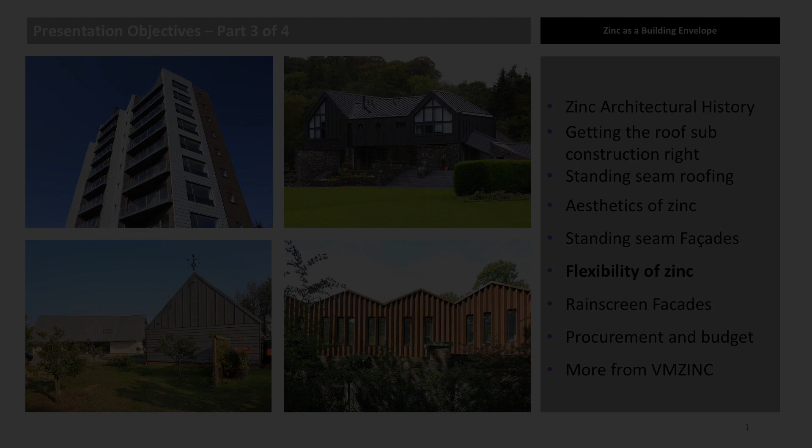Next, the flexibility of zinc. Almost immediately after zinc was first chosen as a roofing material at the beginning of the 19th century, it started to be used as a metal to create roof ornaments. And it still is. On the right, zinc ornaments combining with slate on a bank in Toulouse, France, and on Clapham Bandstand. Ornamental techniques are also used to create complex facades and roofs.

On the left, a project on the Isle of Skye, which uses stamped standing seam panels. On the project bottom middle, in New Jersey, where quartz zinc has created a facade with depth which includes all of the contemporary mouldings and cornices.

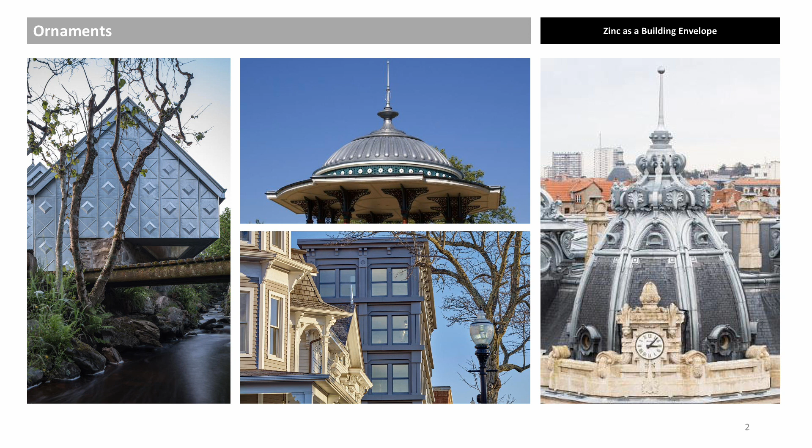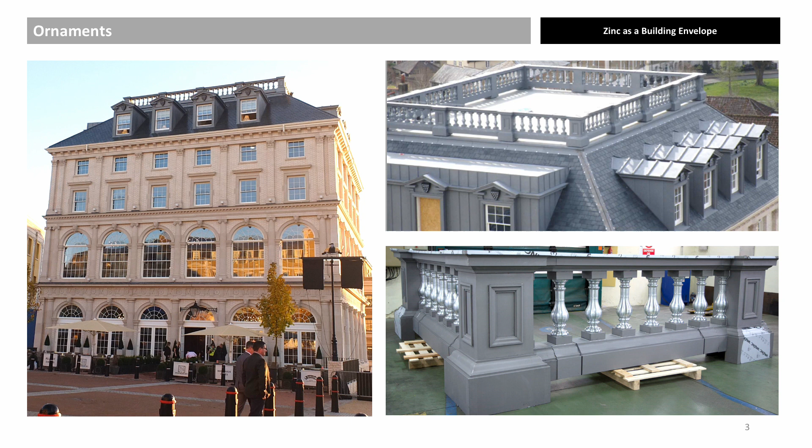At Poundbury, zinc was used in a number of ways, including dormer windows and balustrades. Again, the malleability of zinc allows almost endless numbers of shapes to be formed, whilst greatly reducing the weight of the products when compared to stone or even lead.

On the Parsons Tower project at Newcastle College, anthrazinc and quartz zinc standing seam panels were used to renovate an old 1960s educational block. Zinc lends itself well to this use as it is lightweight, flexible, and a dry trade. The two photos on the left show an example of an extensive retrofit project in France.

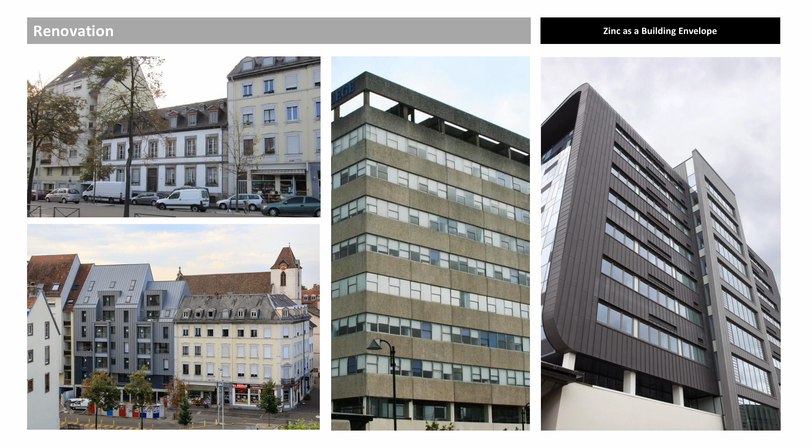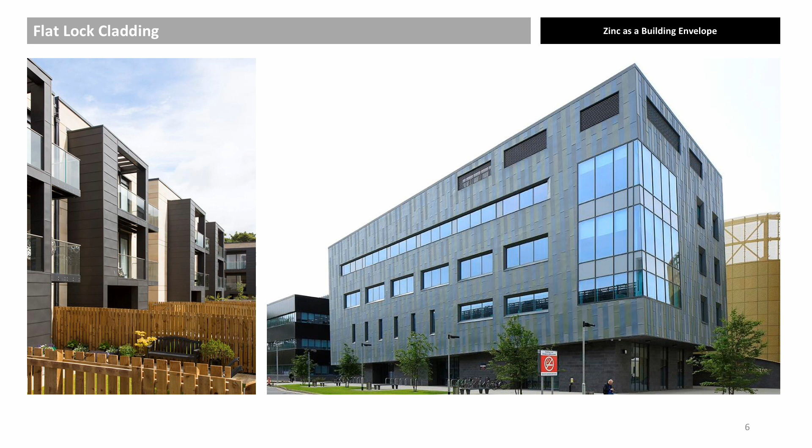The choice of systems for zinc roofs is fairly straightforward, but for facades the options are far greater. Standing seam panels, rain screen cassettes or flat lock panels, which we are now going to look at a little more closely. Flat lock panels come in many shapes and sizes, but 3 meters by 600 millimeters is just about the maximum size recommended. Bespoke shingles are also possible, as seen on this project in Canada.

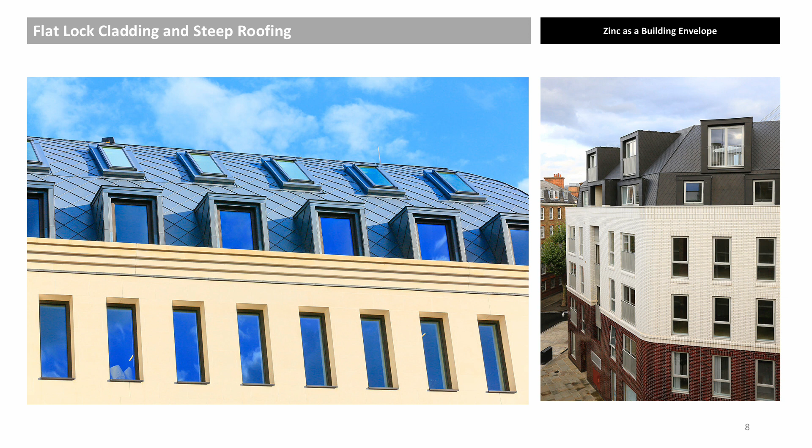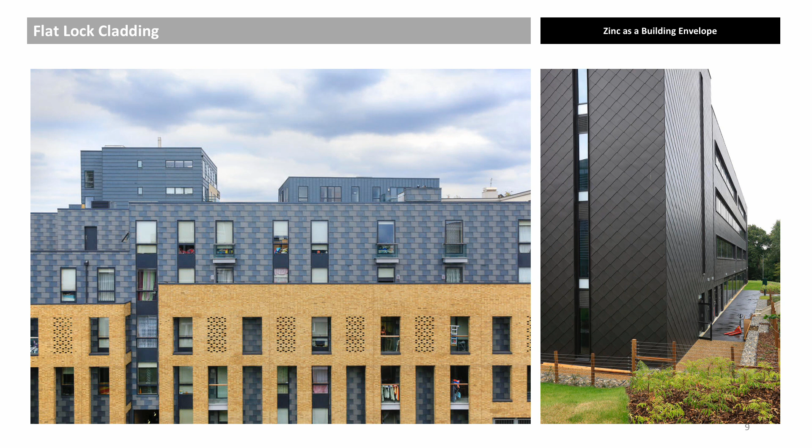Diamond shingles can be used for roofing on slopes above 30 degrees, seen here at Brook Street and Bourne Estate. Kingsland Wharves, Islington by JCMT Architects, and New Science Building at University of East Anglia by Fraser Brown McKenna Architects.

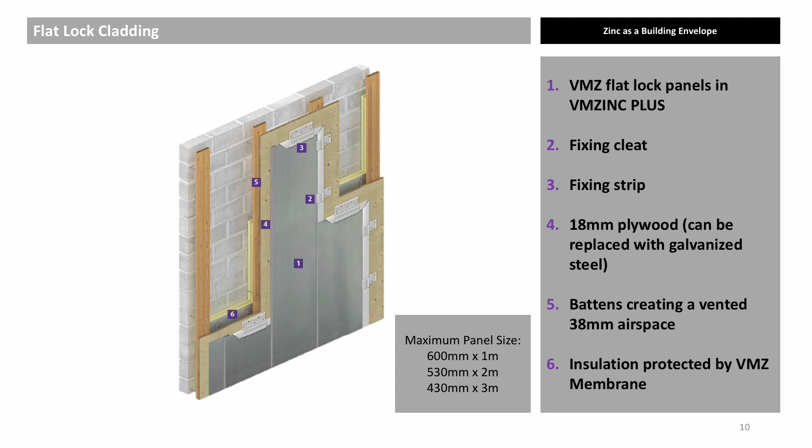Traditionally, zinc flat-lock wall panels of all shapes and sizes have been installed over a vented timber support, and this is still the case for many projects. For projects where EN 13501 A1, A2 materials are required, the timber can be replaced with a 0.7 mm thick galvanized steel deck. As with all cavities, fire barriers must be used in accordance with B3 and B4 of the current Approved Document B. This system still follows the principles laid out in Code of Practice 143-5.

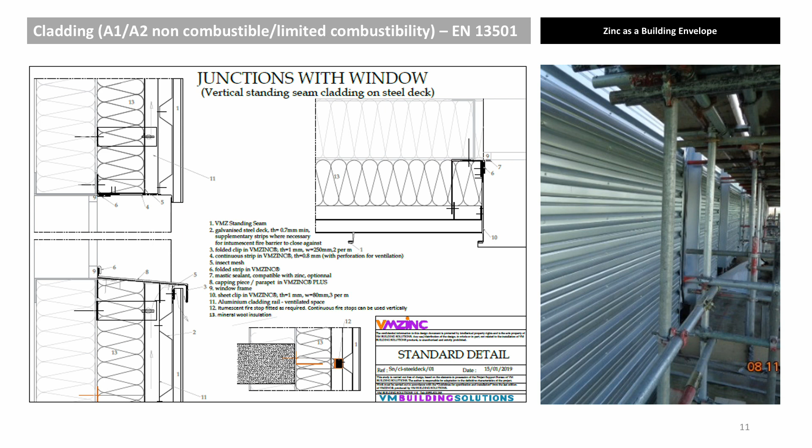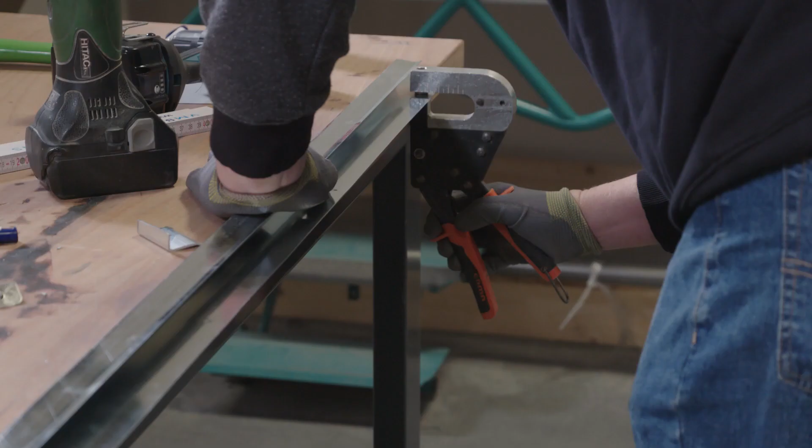Let's look in more detail at the installation of flat-lock panels. Flat-lock panels can be used for steep roofs, but are generally used for wall cladding with a continuous support. The panels are very flexible and can be diamond, rectangular or square in shape, and most commonly have offset joints. Receiver U-shaped flashing strips are cut to size and screwed into place at the windowsill, jambs and head, in this case in natural zinc.

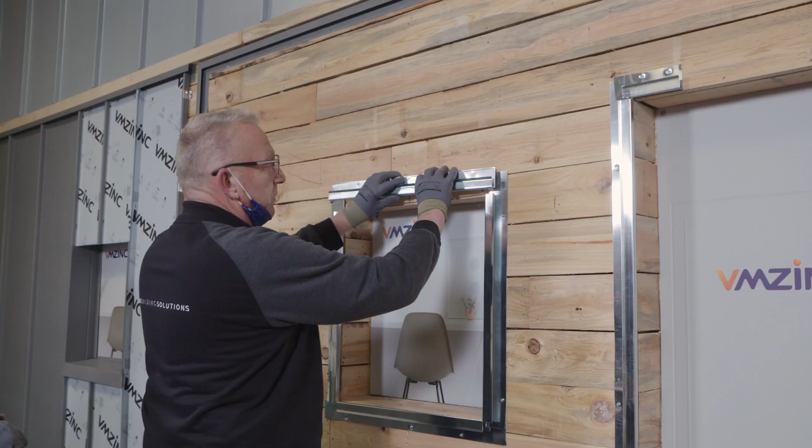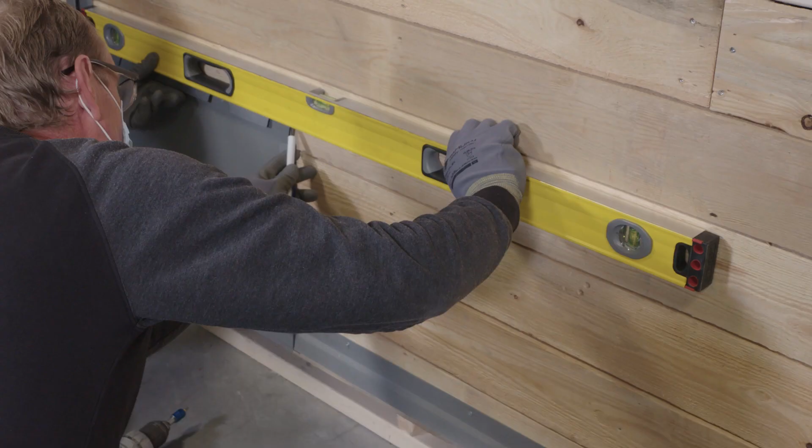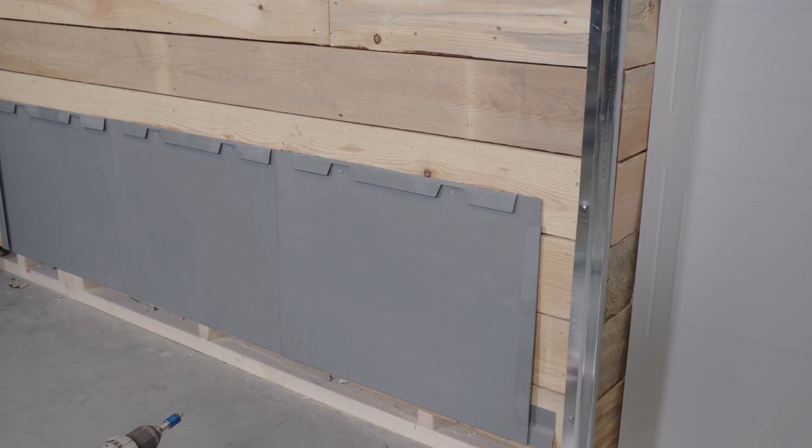At the base of the wall, a receiver flashing is installed, and the flat lock panels are fitted on a perfect horizontal line from bottom to top. Some flat lock panels are fitted with cleats, but here notches have been created, allowing the panels to be screwed directly into place. The panel next to the window jamb is cut to size and fitted.

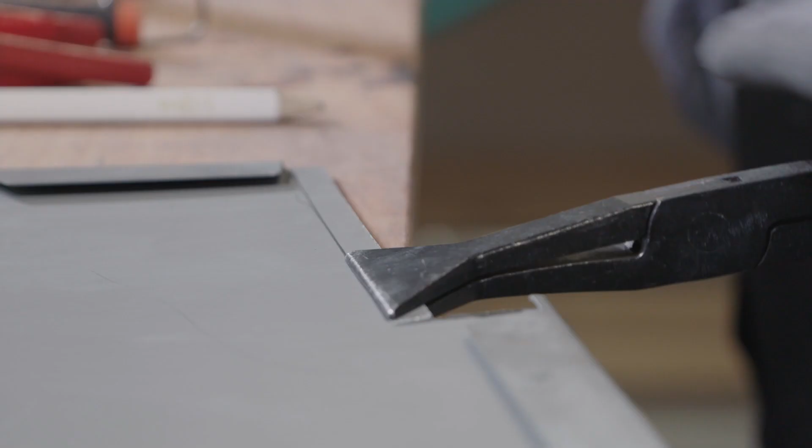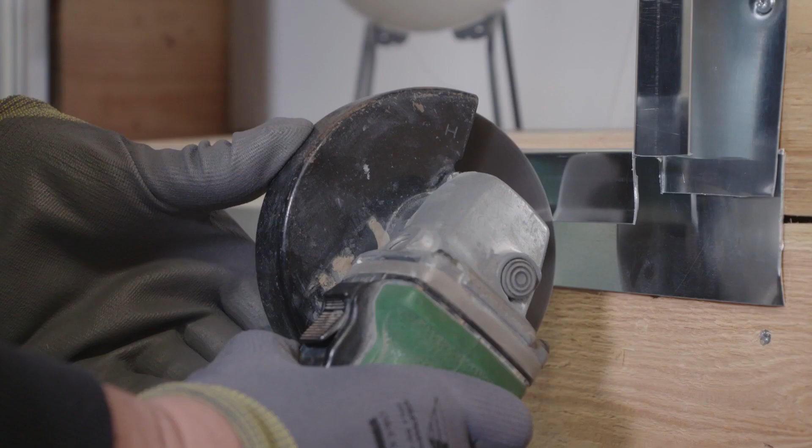The receiver strip at the sill is notched, allowing easy access for screwing in. The panel that wraps around the jamb and head is cut to size with a grinder, but shears can also be used. This panel has an additional 20mm upstand.

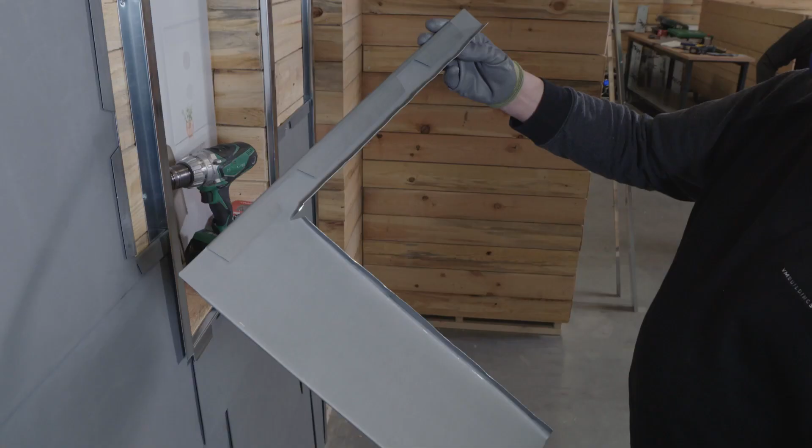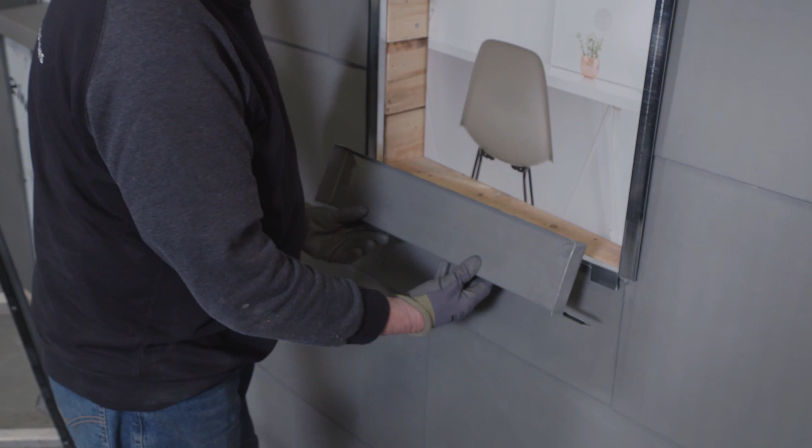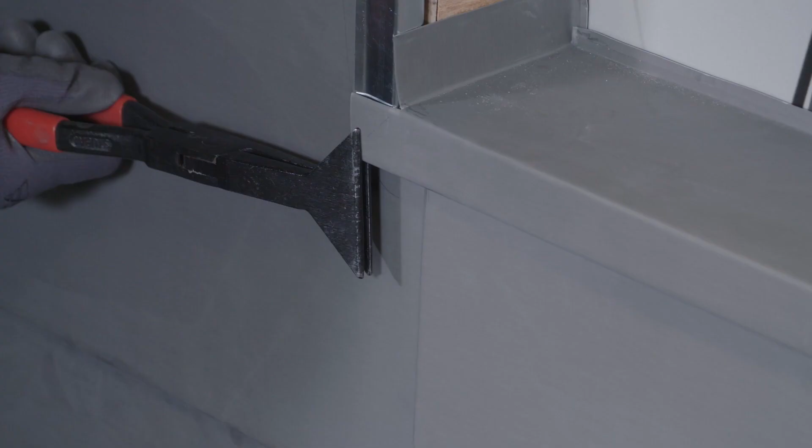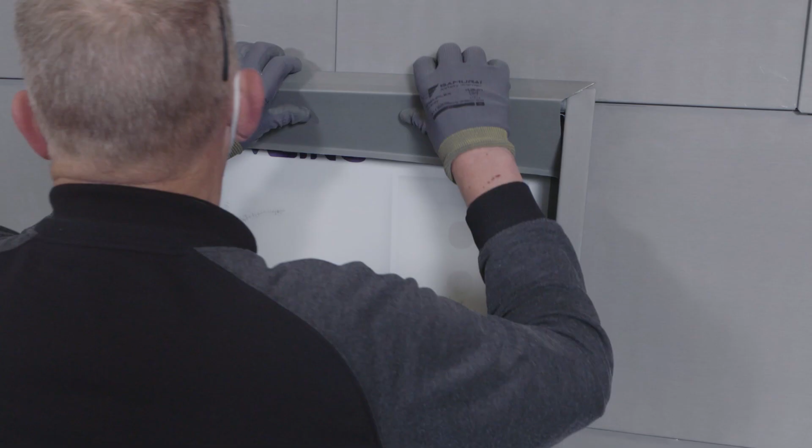At the sill, a panel is installed with 30mm upstands on the jambs. The jamb then overlaps this upstand. The sill is pinched tight at the base. The jambs are then screwed into place. It is good practice to pre-drill the hole before fixing with the lacquered stainless steel screw. The window head flashing is then fitted. The final panels are installed.

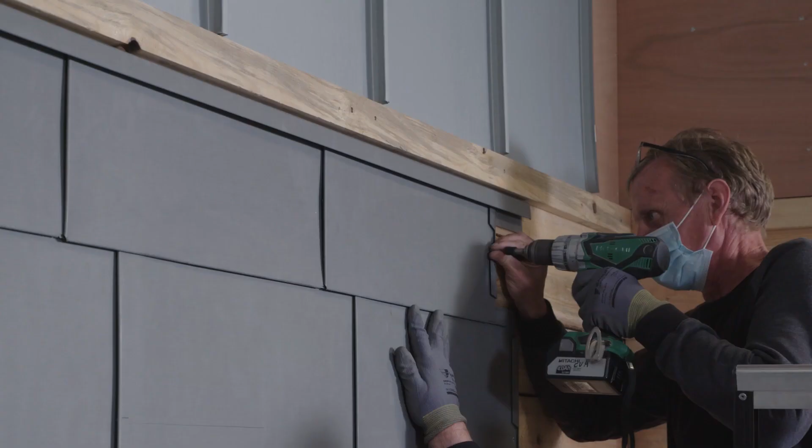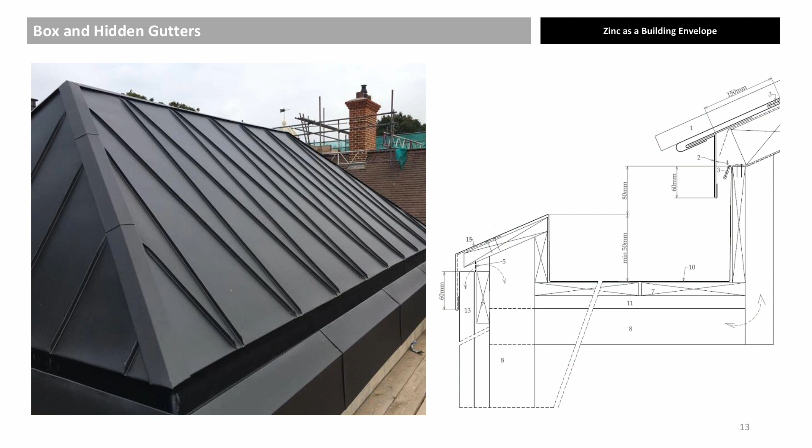Zinc gutters have been used since the beginning of the company in 1837 and maybe even before. Hidden box gutters are common features of zinc roofs. These should have falls of 1 in 100, and overflows and expansion joints must be included.

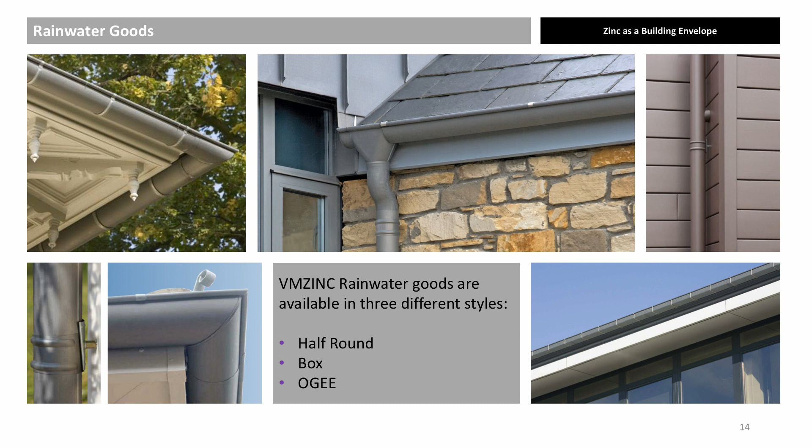Hanging gutters can also be used on not only zinc roofs but also with roof coverings such as slate and clay tiles. A range of half-round gutters in quartz zinc and anthrazinc with hidden brackets are stocked in the UK. Rectangular and ogee gutters are also available. All should be fitted with a minimum fall of 1 in 200.